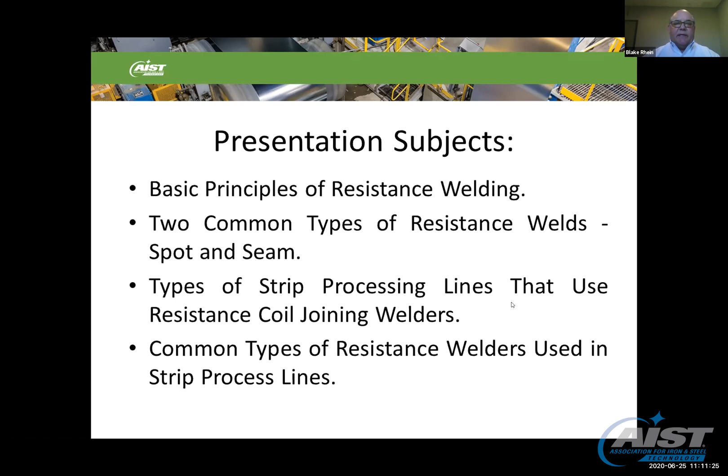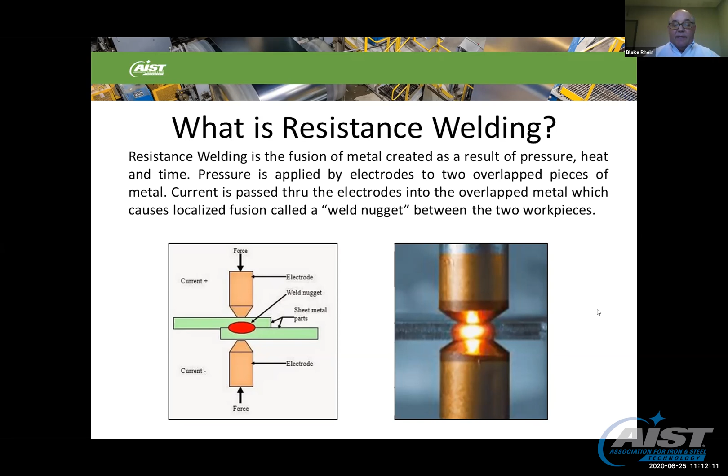So the first question is, what is resistance welding? Resistance welding is the fusion of metal created as a result of pressure, heat, and time. Pressure is applied by electrodes to two overlapped pieces of metal. Current is passed through electrodes into the overlapped metal, which causes localized fusion called a weld nugget between the two pieces. You can see on the image to the right, the two copper-looking pieces are the electrodes, and that bright, shiny part in the middle is the weld nugget being formed between the electrodes.

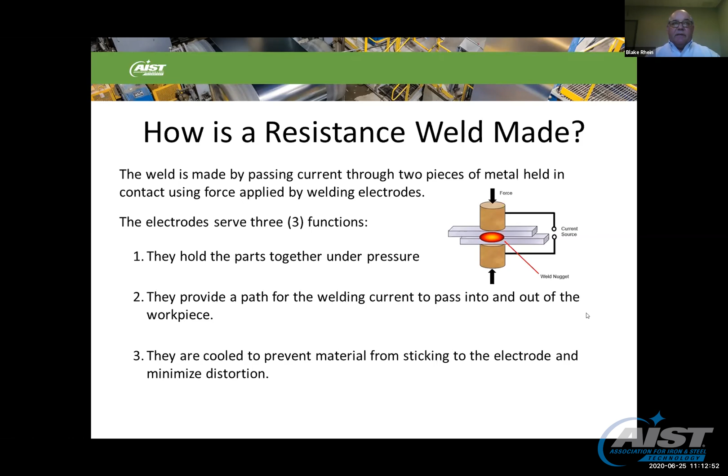The next question is, how is a resistance weld made? The weld is made by passing current through two pieces of metal held in contact using weld force applied by welding electrodes. The electrodes serve three functions: they hold the parts together under pressure, they provide a path for the welding current to pass into and out of the workpiece, and they are cooled to prevent material from sticking to the electrode and minimize distortion at the weld interface.

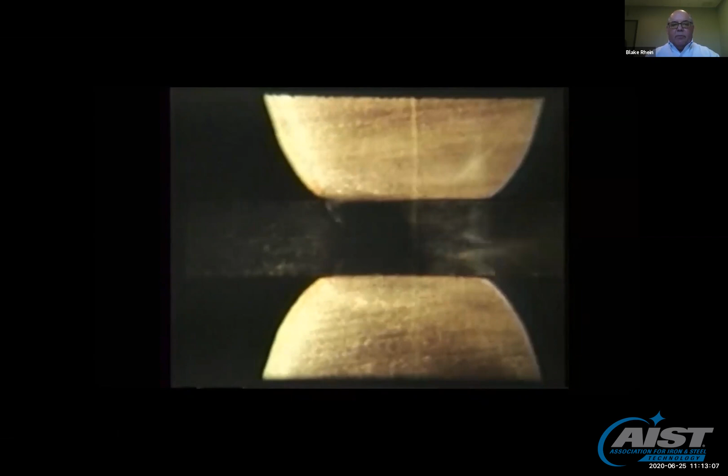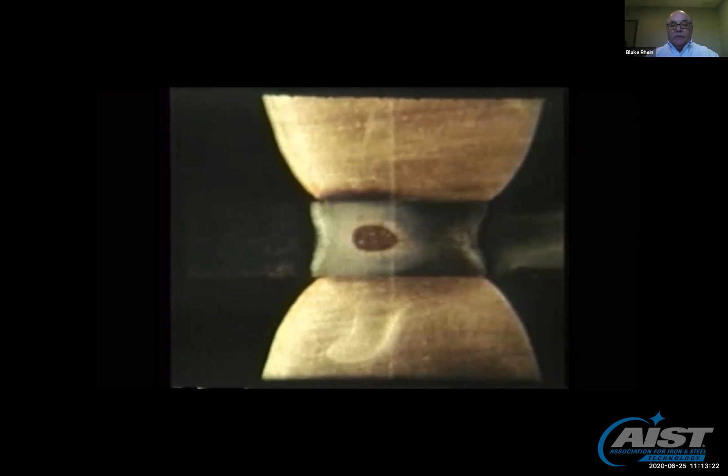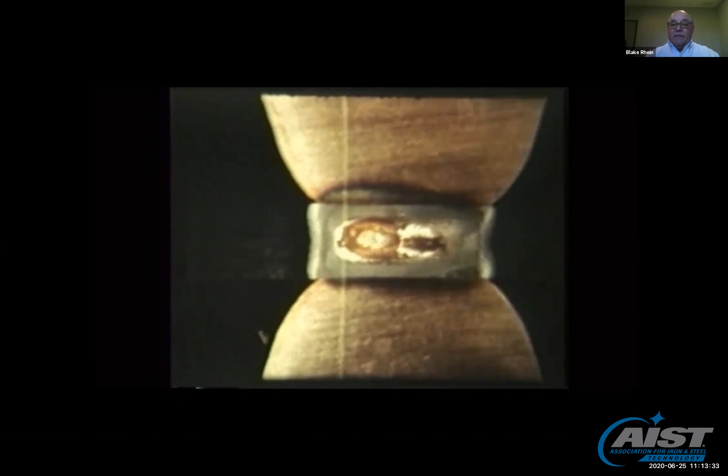This is a video of a weld being made, shown at 2 times slow motion. The yellow parts you see above are the electrodes, and the weld nugget is being formed in the metal between the two electrodes. You can see the heat being generated between the two electrodes and the beginning of the weld nugget being formed. That beautiful looking weld nugget that's spinning and being formed is actually molten material being created between the two electrodes.

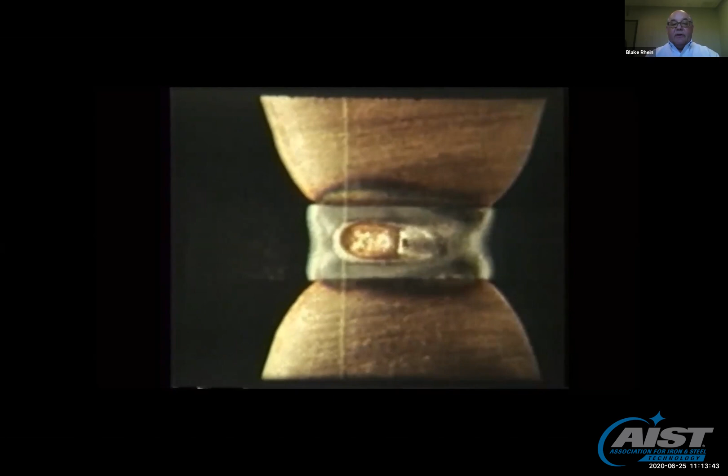The electrodes stay in place with force, and you can see the heat being dissipated into the electrodes. After the nugget is formed, the electrodes release and the material is joined. So that is a spot weld.

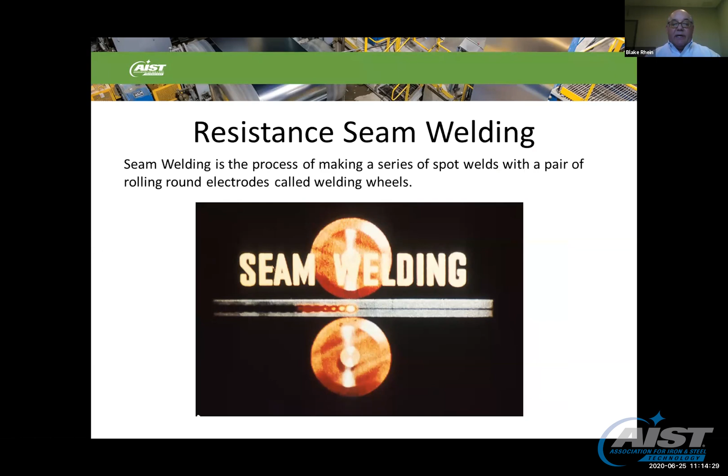The second type of resistance weld we'll talk about is a seam weld. Seam welding is very similar to spot welding, but it uses two round electrodes that deliver current to the workpiece. Seam welding is the process of making a series of spot welds with a pair of rolling round electrodes called welding wheels. In resistance seam welding, a silicon-controlled rectifier, or SCR, is mounted in a weld control that turns the welding current on and off at predetermined periods of heat time as the weld wheels move across the workpiece.

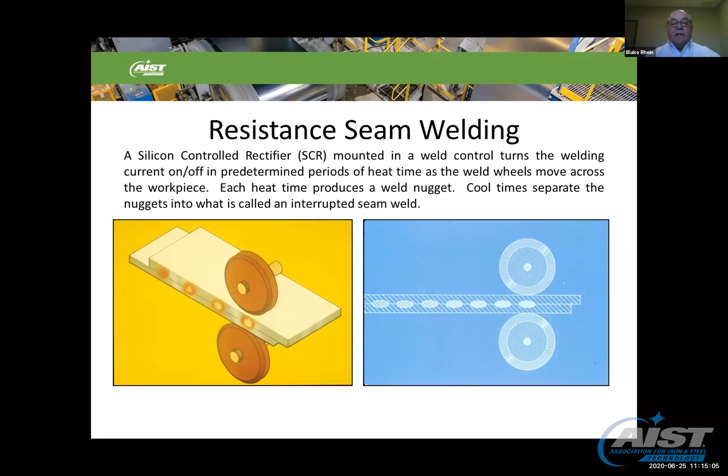Each heat time produces a weld nugget like you saw in the video. Cool times separate the nuggets into what is called an interrupted seam weld. Shorter cool times cause the nuggets to overlap each other, which produces a continuous airtight seam between the workpieces. Whether the nuggets are spaced far apart or overlapping depends on the application. In most airtight or watertight containers sealed using resistance seam welding, the nuggets are overlapped so that the container or vessel is airtight or watertight.

Whereas some piece of structural steel used in construction doesn't need the weld nuggets to be overlapped - it just needs the weld strength. So the nuggets would be spaced further apart.

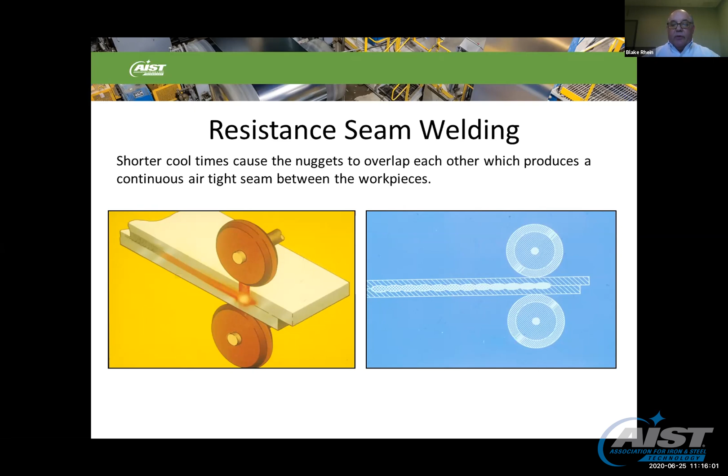The types of strip process lines that use coil joining resistance welders include coating, galvanizing, coil buildup, pickling, cold rolling mills, and chrome plating. The coil joining welders are used in virtually any continuous process line to enable that line to run 24/7, 365 days a year, except for maybe a couple of weeks of maintenance downtime.

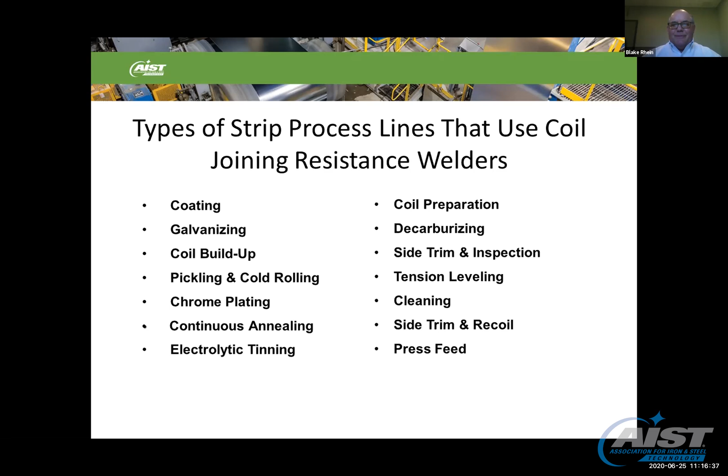The common types of resistance welders used in strip processing lines include a resistance spot welder, such as the one shown on the left, or a resistance narrow lap seam welder, which in the industry is sometimes called a mash seam welder.

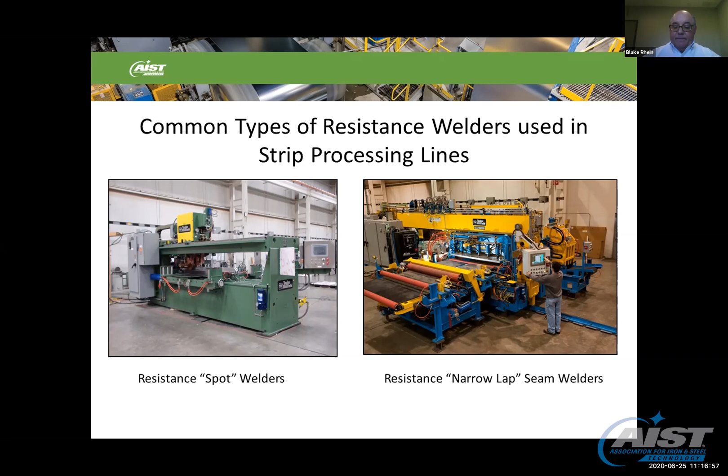With coil joining spot welders, the resistance spot welders for coil joining are designed to create a weld between 2 overlapping coil ends. The weld is considered a transport weld, since the resultant weld joint equals the 2 strip thicknesses being joined, with no reduction at the weld interface.

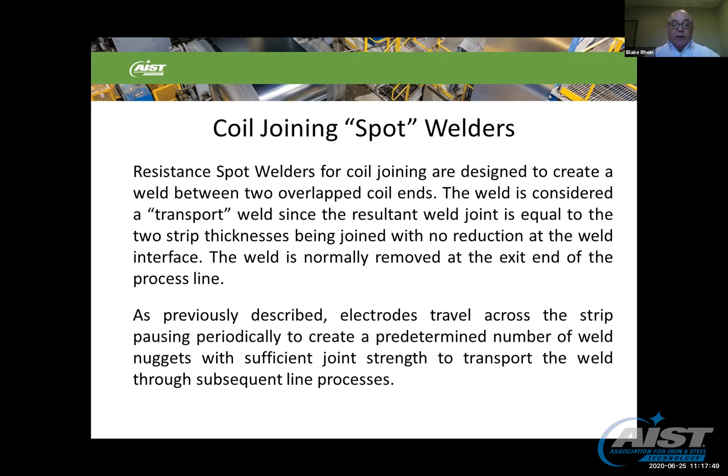In this case, the weld is normally removed at the exit end of the process line. As previously described, the electrodes travel across the strip ends, pausing periodically to create a predetermined number of weld nuggets

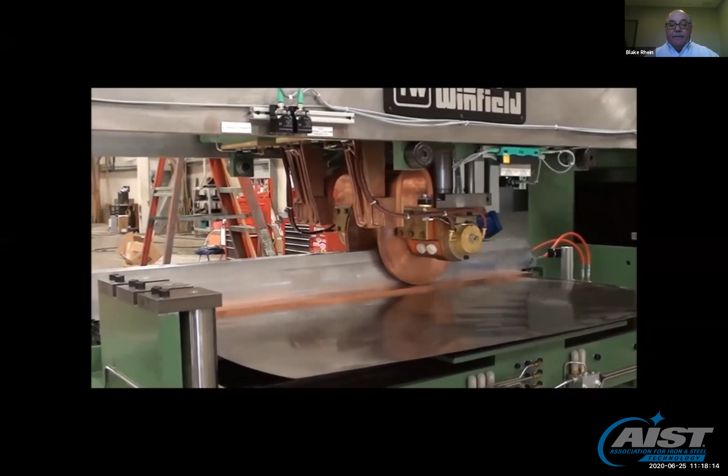with sufficient joint strength to transport the weld through subsequent line processes. This is a video of a roll spot seam welder. The electrode heads are lowering. They travel across the overlap between the two steel sheets. Whenever you see the weld head stopped, a weld is being made. When it's moving, that's called the cool time. So in this case, we're making a series of spot welds across the strip overlap.

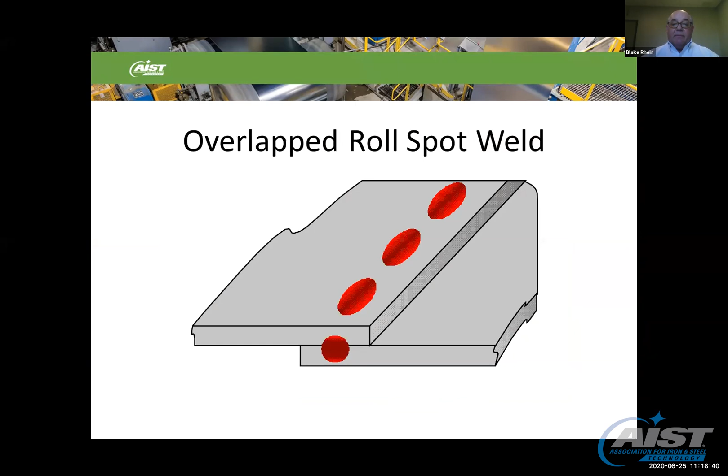In the case of resistance narrow lap seam welders, a resistance narrow lap seam welder creates a smooth, thin, and ductile overlap welded joint. The strip ends are narrowly overlapped and electrical current is passed between them using welding wheels to create sufficient heat for fusion. Pressure is applied as the weld wheels travel across the overlapped strip ends, resulting in a welded interface with near zero weld over thickness across the strip material.

The weld seam can pass through the processing line, generally without creating damage or requiring changes to the line operating parameters. And then depending on the type of the process line, the weld may or may not be removed at the exit end of the processing line.

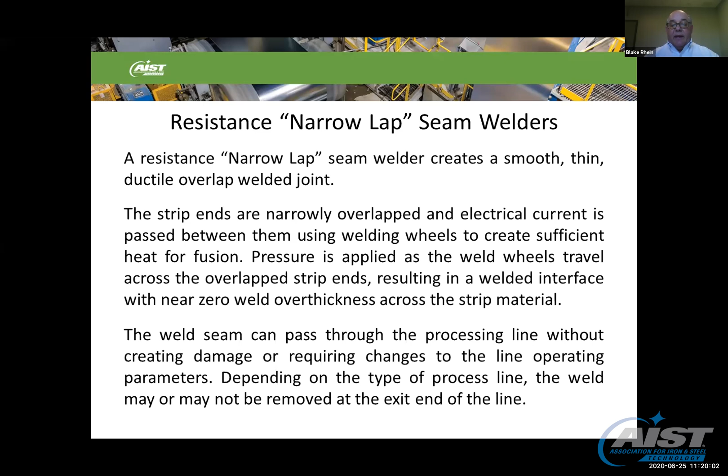A narrow lap seam weld graphically looks something like that. It's near parent metal thickness after the weld is made and is sufficiently strong to hold through the process line.

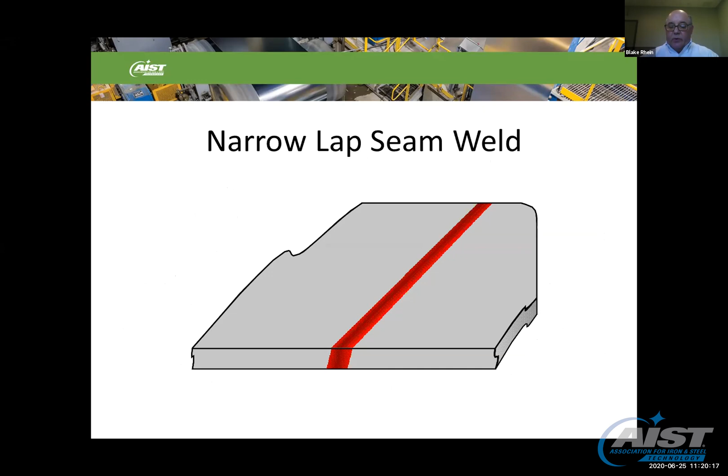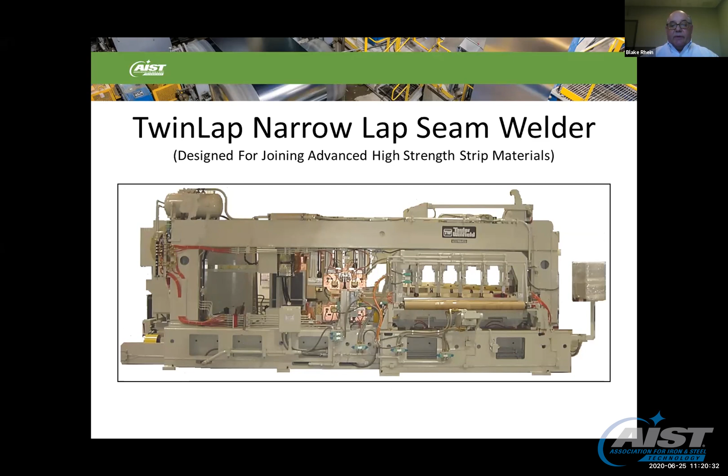This is a typical narrow lap seam welder. It's what we call a TwinLap narrow lap seam welder, which was designed originally for joining advanced high strength strip materials. So let's show you the sequence of how a TwinLap narrow lap seam weld is made.

In this image, the horizontal blue lines represent the strip material. So the strip ends are stopped in what's called the welding shear gap in between the entry and exit clamps.

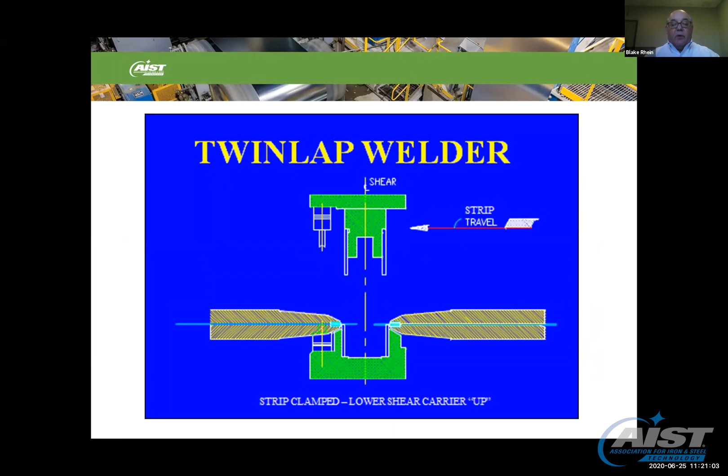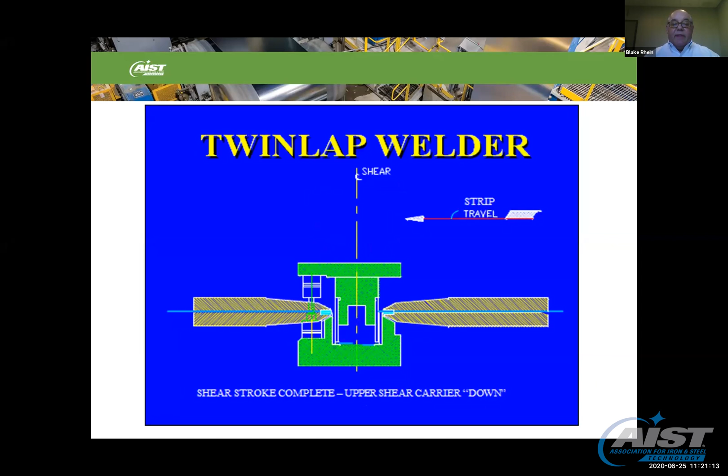The clamps are closed. After the clamps are closed, the lower part of the shear carrier moves up to make contact with the underside of the strip material. The upper shear then comes down and cuts the material.

Once the strip ends are sheared, they're squared to each other and ready for overlapping.

In this case, the exit side, called the exit pivot clamp, moves up, and the entry clamp moves forward, and then the exit clamp pivots down, which creates the overlap between the 2 strip ends.

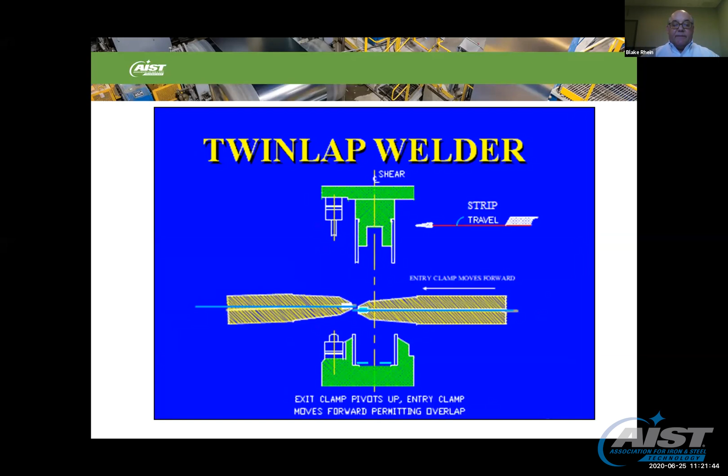Once the material is overlapped, the exit clamp pivots down to make the overlap, and the strip end is ready for welding and planishing.

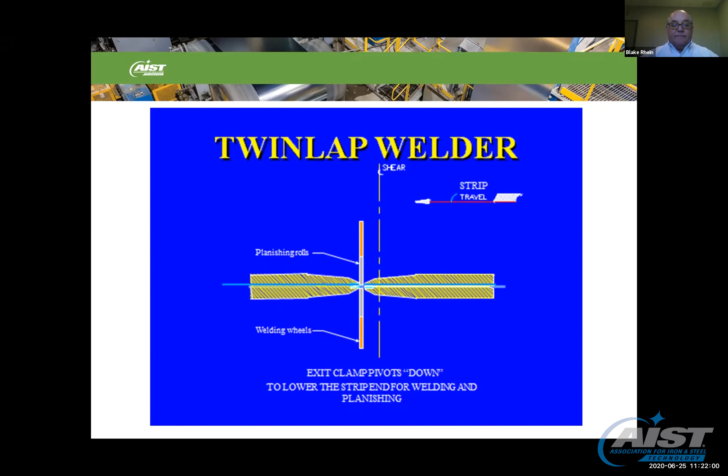Here is a typical machine cycle. The clamps are closed, the exit shears the material, the entry clamp moves in, the exit clamp pivots down, and then the welding carriage drives the welding wheels across the strip material. That happens to be 2 pairs of welding wheels.

The small silver wheel following behind it is called the planish wheel that simply polishes off the weld and makes sure there's little or no weld over thickness. So this is the sequence moving across the strip material, making the weld.

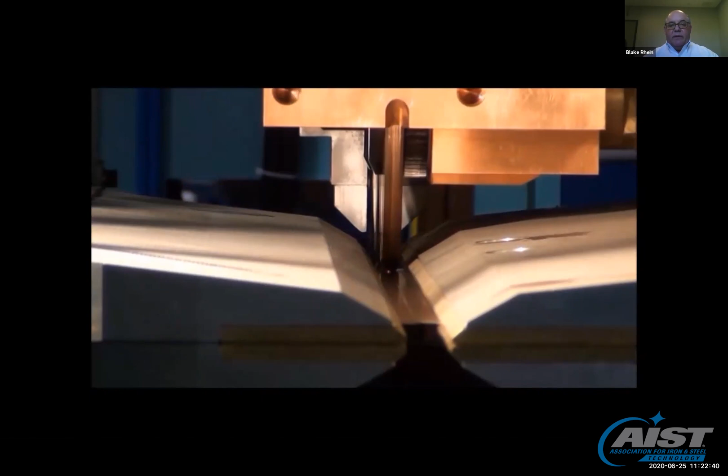In this view, you can see the current being created in the overlapped interface between the head and tail end of the strip material. Once the sequence is done, the clamps open and the strip is released to flow through into the process line.

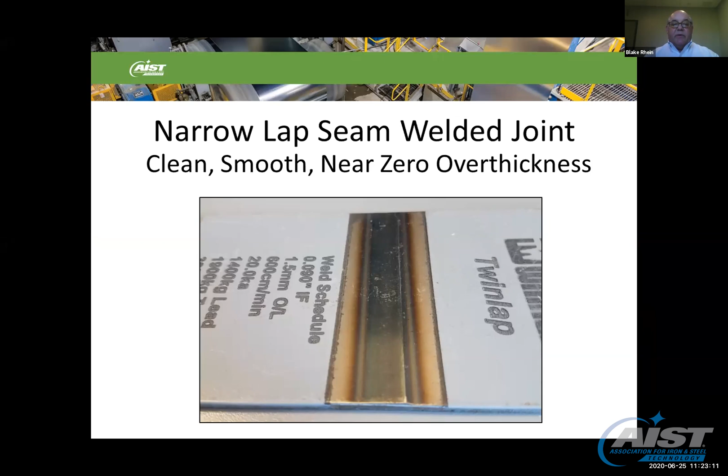So this is an example of a sample of a narrow lap seam welded joint. It's clean, it's smooth, and there's near zero over thickness.

My last couple slides will talk about today's strip material and what's called post-weld heat treatment. With today's advancements in material strengths, steel has higher strengths and carbon equivalent values that can make the weld brittle after joining. Post-weld heat treatment is often added to the welding process to restore ductility to the weld without sacrificing weld strength, and to ensure weld integrity to prevent weld breaks downstream in the process line.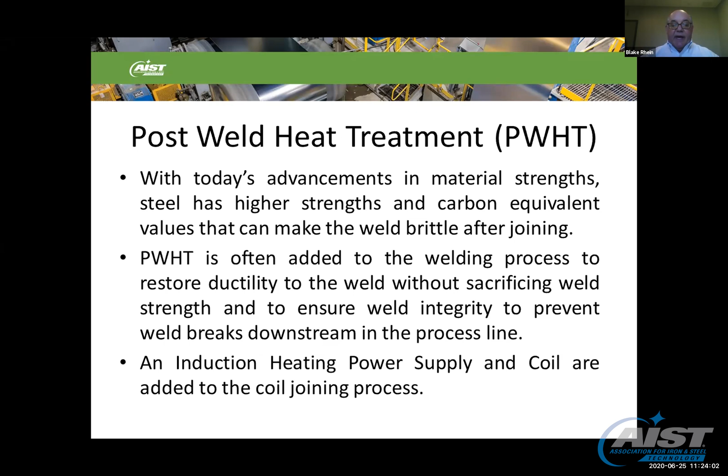An induction heating power supply and coil are added to the coil joining process. And in my last video, you will see the process operating, with the weld wheels going across the strip material, making the weld.

And trailing behind is a very long induction heating coil. The red parts that you see are the induction heating coil. So after the welding sequence, the clamps will reposition the weld to the center line, and the induction heating coil will be lowered to then induction post-weld heat treat the welded interface. After the post-weld heat treat sequence is finished, the clamps open and the weld is released into the process line.

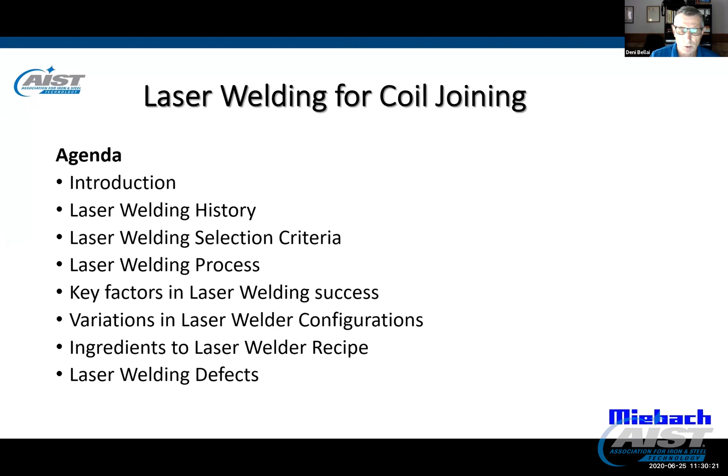So who am I to be talking to you about laser welding? Besides what you've already been told, I can add this: I've got about 20 years of working experience with industrial lasers. I've worked on developing laser cutting using solid state lasers, as well as developing the welding process and reliability systems for a CO2 laser welder. Now I'm the sales agent for Hugo Miebach welding machines here in Canada and in the US.

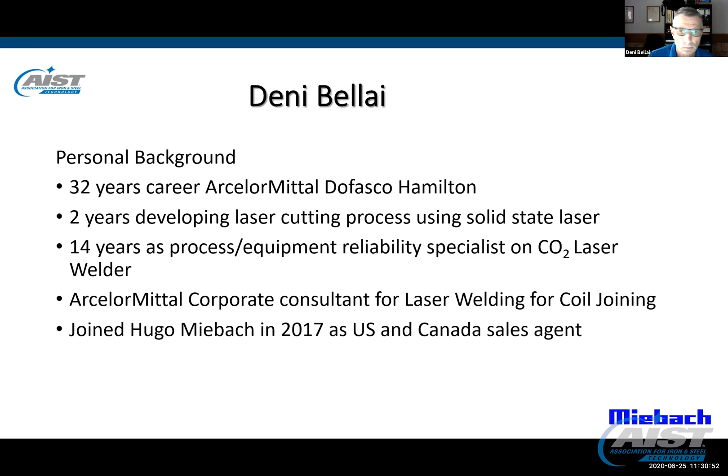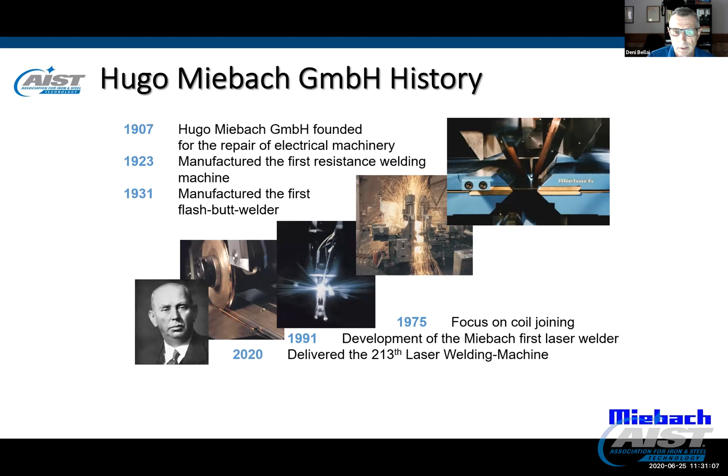Now for the brief history lesson. Laser welding has been in use in the steel industry since 1991, when Hugo Miebach put their first laser welder into production in Rockport, Indiana. Since that time, over 213 laser welding machines have been put into service by Miebach alone, and this does not account for other laser welding machine manufacturers.

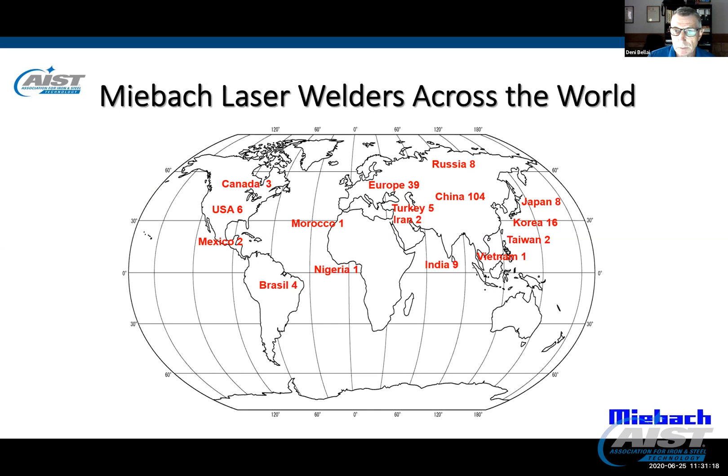Now that you've had some background information, you might ask, why would anyone want to consider a laser welder to join their coils together? Mostly that comes down to their capability to weld practically any steel together quickly and reliably. The technology not only has an inherent wide range of weldability, but it's also easily adaptable or flexible enough to work with other welding tools.

Let's start with weldability. Laser welding enables the coil joining process to weld the widest variety of steels. It's the most capable process for joining different steel grades and cross sections to one another. It can weld hot band or tin plate and all varieties of finished products in between. The process itself is minimally disruptive due to the very small heat affected zone. It is very conducive for inline heat treatment, to maintain ductility in the weld with minimum disruption of the cycle time.

Wire feeding is also easily adopted to the laser welding process. This allows for the dilution of the hardenable material from the weld, thus maximizing the capability of the welding machine.

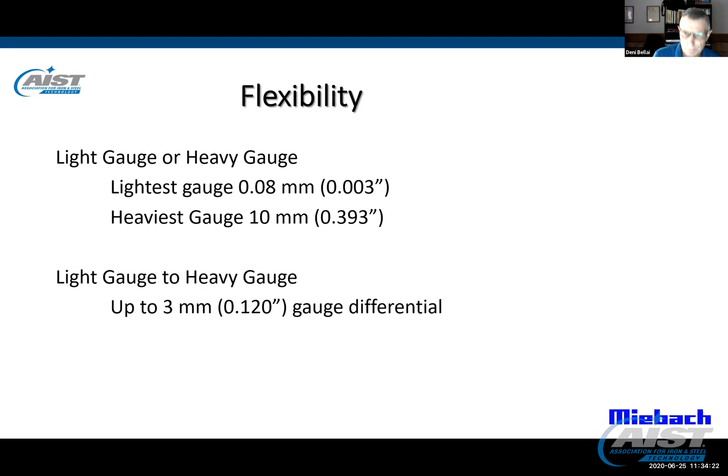With the increased availability of higher laser power and the introduction of faster drive systems, laser welding machines now have surpassed other welding processes in the coil joining field. Cycle times of under a minute are quite common in heavy gauge applications. The reduction in cycle time not only increases productivity and throughput, but allows line builders to use shorter loopers to reduce capital costs and minimize footprints for their new process lines.

Laser welders produce no over thickness. The welds are flush with the surface of the parent material. Welds can be rolled in cold mills or temper mills without opening gaps or producing off gauge. Coating or painting lines do not need to be disrupted as the weld passes through the process, avoiding damage to roll coaters or other equipment.

Line stops or slowdowns are often not required when the customer will accept welds in coils when the laser is used. On high-value products like electrical steel, silicon steels, and coating in tin lines, the additional cost of a laser welder often is justified in less than a year if you look at the ROI, and that's just from the increased yields.

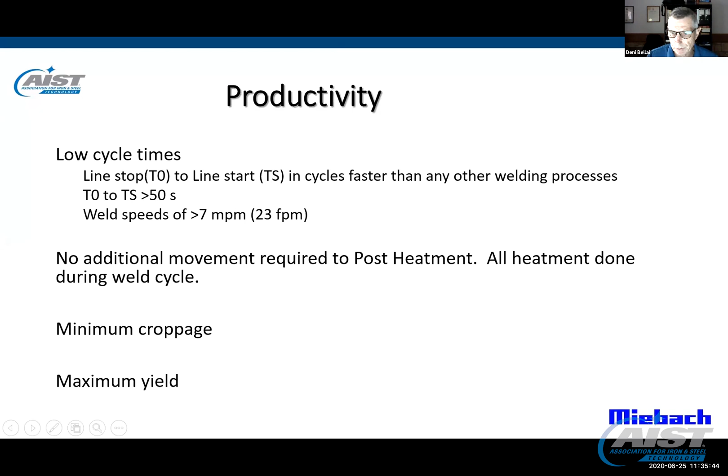So laser welding produces the strongest, most reliable welds in the industry.

Weld break rates of less than 1 in 1,000 are reported by Miebach customers on lines that have cold mills attached to them. First-time weld rates of greater than 95% on pickle lines and over 98% on cold rolled products are achievable. Laser welders do not necessarily need constant maintenance or production stops to keep the welder running.

There's no welding wheels to be redressed or trimmer bits to be replaced. Typically, a laser welder needs minimum maintenance between scheduled outages. The laser welders do have their own unique specialized maintenance requirements, but overall cost for maintaining a laser welder in the current state of development is hardly more than a resistance welder.

Laser welding can be the most capable of all coil joining processes. That capability can only be sustained by providing a stable machine, otherwise it will turn into your biggest nightmare. There are a lot of moving pieces in a laser welder with sensitive optics that have a low tolerance for dirt. When these parts wear or the optics degrade, the capability is quickly lost.

A good machine design is strong and simple to work on. A machine that minimizes wear points has long-term benefits in sustaining that designed-in performance capability. Reducing sources of contamination while protecting the optical components from weld fume and spatter will extend life.

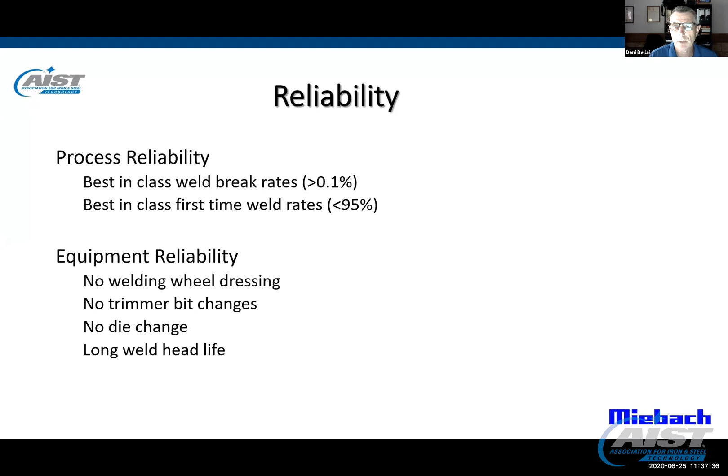Laser welding is similar to seam welding or resistance welding that Blake was just talking about. The strip still needs to be positioned with a pinch roll and centering guides, so it's very much the same in that way. The ends of the strip still need to be cut and squared off in preparation to be joined. The differences come in the geometry of the cuts and the type of energy used to fuse the material together.

In laser welding, the heat source is derived from focused laser light energy. The profile of the cut needs to be extremely square.

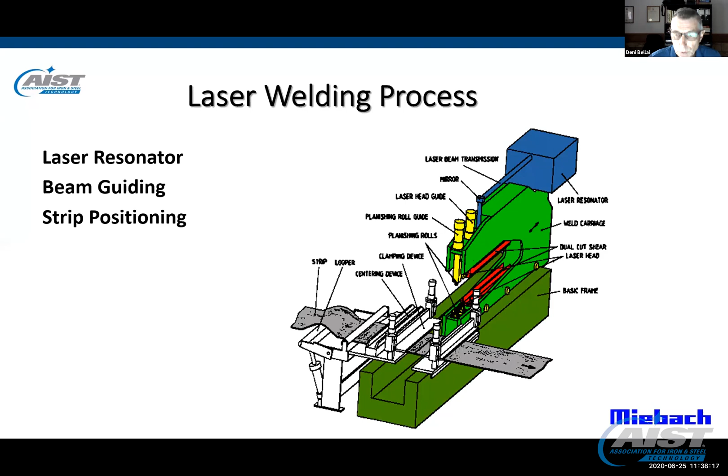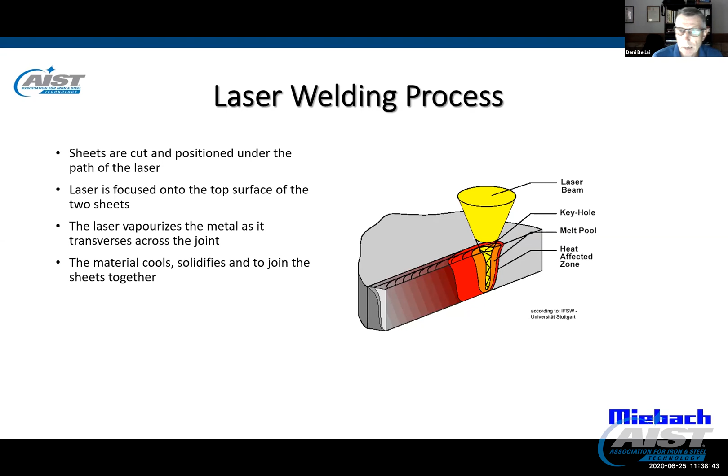So the laser welding process begins with preparing the strip by cutting the ends and positioning them under the path of the laser beam. The laser is focused down onto the joint between the two strips. The high power density of the laser light energy vaporizes the metal as its focused beam traverses across the joint. The metal cools and solidifies and forms a seam that joins the two pieces together.

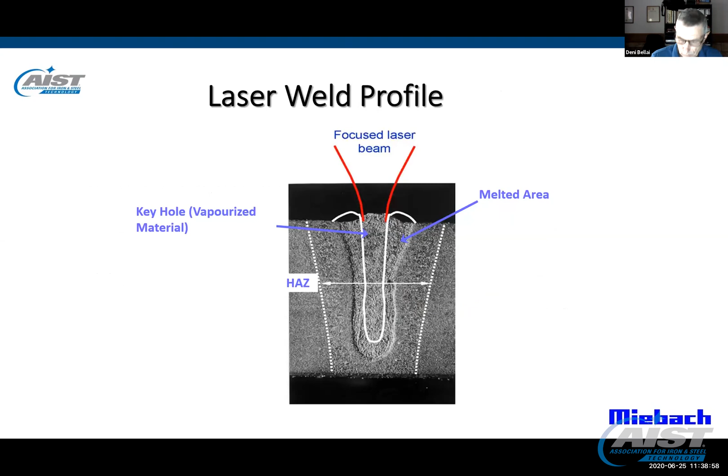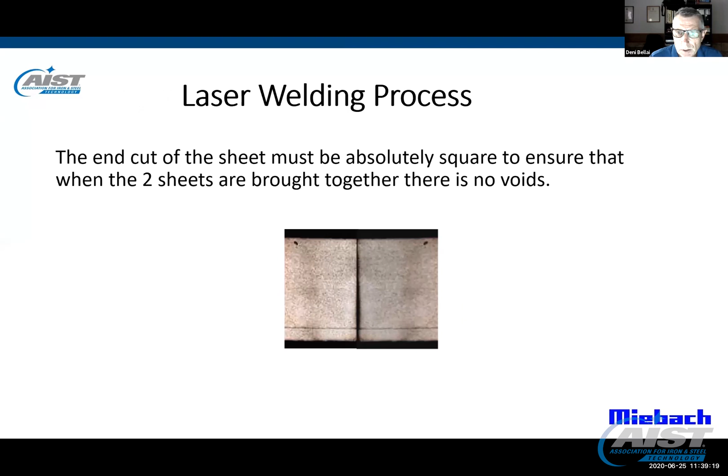So the laser welding process requires very accurate and precise positioning of the strip and the laser beam. Starting with the cut profile, it must be nearly perfectly square, so when the sheets are brought together, there is a tight fit and minimal voids in the gap.

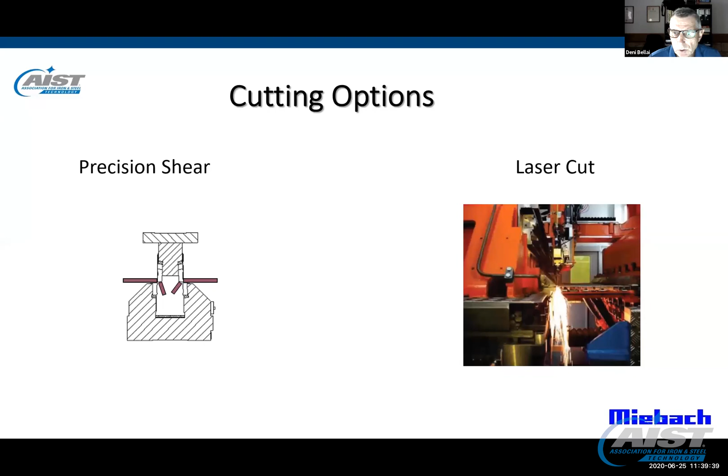To achieve this kind of geometry, there's a couple of options for cutting the strip ends to provide a clean square cut. The most common method is to use a precision shear, which is shown on the left. More recently, laser cutting has been used for this purpose. They each have their advantages and disadvantages.

The apparent maintenance cost advantage of laser cutting has drawn much interest of late, but this is a dirty process, and that has a fairly high operating cost when you start looking at gas consumption. A close look at the total cost of ownership may surprise some, so a review of all costs should be undertaken to determine which is really the best suited for a given application.

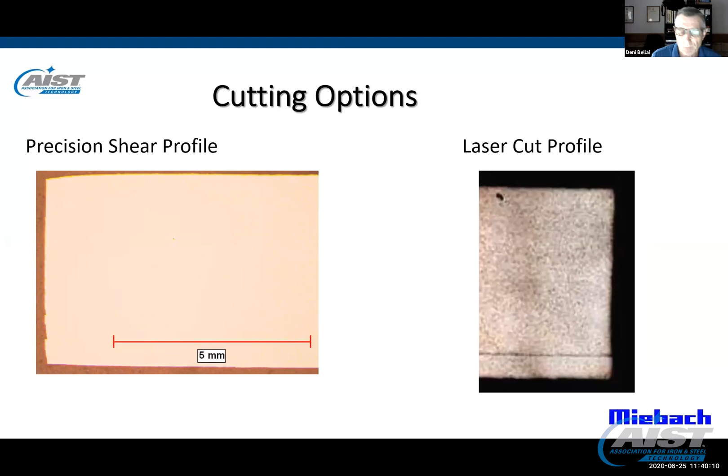There are two options to be considered for the laser source in laser welding. The one that has been in use almost exclusively for the past decades is CO2. In the last few years, the welding manufacturers have been offering solid state lasers as an alternative. These two laser types are quite different in their optical characteristics and each have their own unique set of processing characteristics. Which laser is best is a subject that is quite involved. An in-depth review needs to be done to understand the implication that each has on weldability, reliability, and safety.

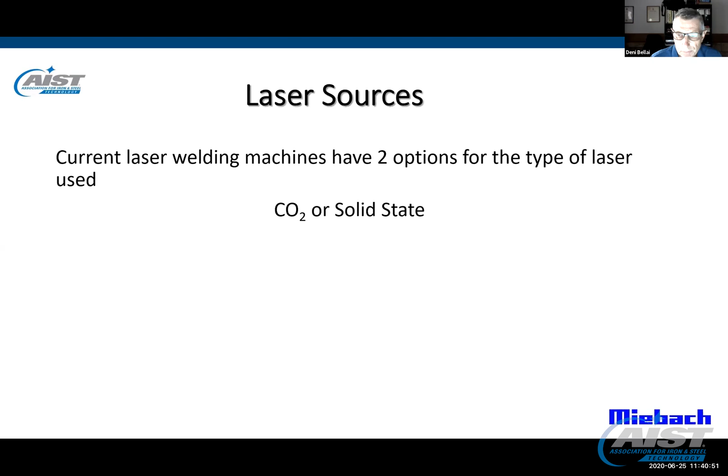What goes into the welding recipe? A recipe for a laser welder has a number of different parameters that can be adjusted to produce a good weld. The key factors are laser power, welding speed, focus position, and gap between the strip.

If the machine has pre and post heating, the power settings for these are also required. If the machine uses laser cutting, then again, the power, cutting speed, focus must be set as well as a gas flow rate. There are as many as 15 individual parameters in each recipe.

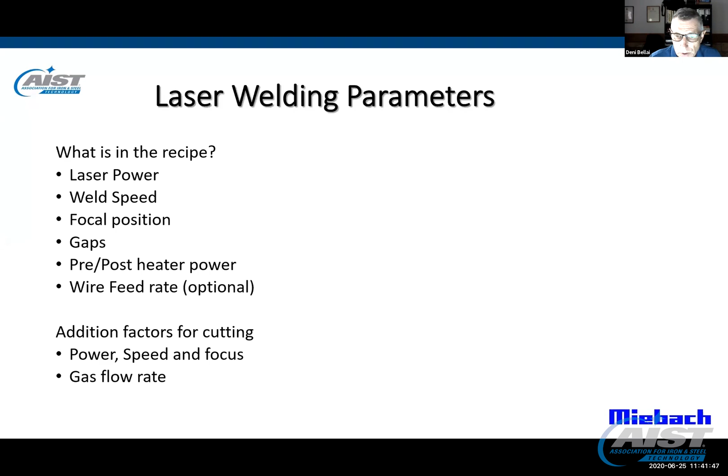Recipes may vary between material types that they're joining, the thicknesses, and the combinations of material types. It's not uncommon to have over 2,000 recipes for a machine, with 30% of these in regular use. Recipe development is a long and tedious process and requires a good understanding of the process to optimize.

Laser welding is not perfect. It can produce bad welds if the process parameters are not properly tuned, or if there's a problem with the machine. Often there's an issue with something on or in the material that affects the welding. The net result is a bad weld. The most common defects can be categorized as either underfill, reinforcement, lack of penetration, porosity, or mismatch.

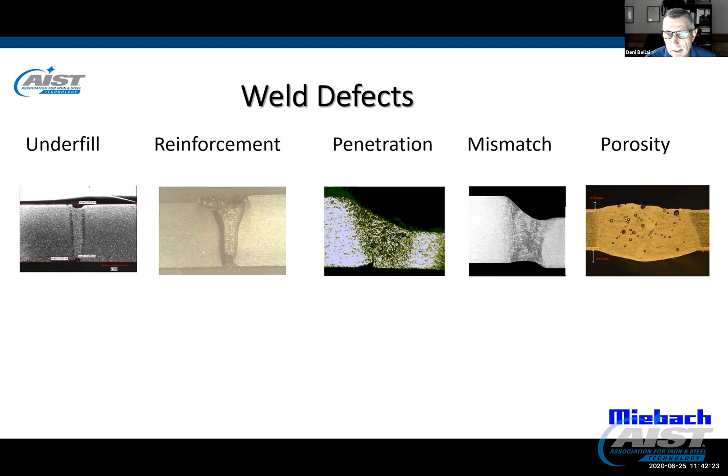There are a number of tools that can be used to detect these defects, but I'll leave that subject to our next presenter to delve into.

If a laser can weld practically any steel together faster and more reliably than other welders, why not go with them all the time? Well, it comes down to cost. Laser welders can cost over 40% more than a seam welder. Does your process need all that capability of a laser welder? Or can you use a resistance welder or other coil joining technology instead?

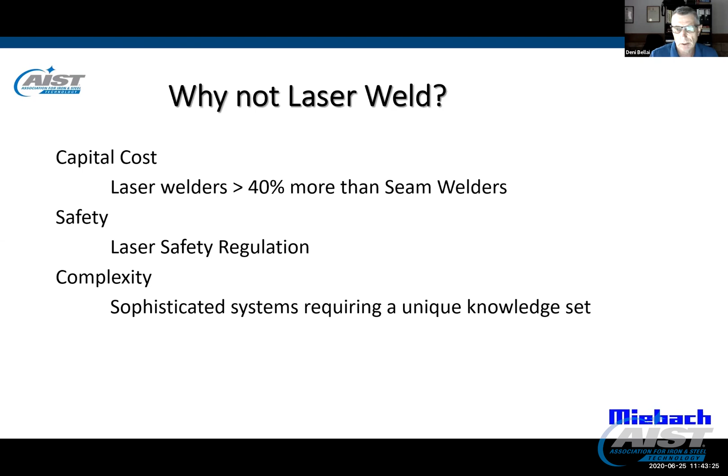The laser adds an added risk factor to the safety of those working on it. There are stringent regulations regarding protective devices and training that are required for a laser welder, that are otherwise not required for other types of welders. These must be considered. Finally, the laser adds an added layer of complexity to the operation and maintenance of the machine. Additional training and new skill sets must be developed to maximize the benefits of the machine and sustain its inherent capabilities.

Well, that brings me to the end of my presentation. I hope you got something out of it. I'm now open for questions.

Oops. All right, let me see over here. I think there are still pending questions for Blake, which I'll get back to at the end of the seminar. But Denny, I have two questions for you. Okay, one is...

What type of welding can be used for joining gauges with differential thickness of more than 3 millimeters? I don't think there's a welding technique that can handle that. I'm not sure about plasma, whether that would be any more capable than a laser. Pretty much anything you can do with plasma, you can do with a laser. So more than 3 millimeters, that's quite a large jump—I don't know, I can't say.

So just adding to this question, and this was another question I asked: what is the difference of thickness and width which can be welded? That's pretty much that 3 millimeters is the most I've ever seen when combining two pieces together. Now I was talking about something that was 2 millimeters to 5 millimeters. I wouldn't want to be doing like 0.5 millimeters to 3.5 millimeters—that could potentially be a problem. But in the heavier gauge machines, I would say 3 millimeters is the max.

So today we're going to talk about inspection of welds - seam, overlap, and laser keyhole. I myself am far more experienced in laser UT than in welding itself, even though I've been in the industry for quite a while, so I'm sorry if I make some small mistakes, but I'm trying to focus mostly on inspection.

So right into the topic - failure causes, there are many. It could be wrong or non-optimized welding parameters, drift in voltage or pressure, drift in laser alignment, laser energy, surface conditions, overlap cut - many different causes that lead to different failure mechanisms, which could be a plain cold weld, a brittle fracture, insufficient weld area, nugget problems, or localized defect propagation caused by voids or inclusions.

100% prevention of weld failures is not a simple challenge, but weld breaks cost so much in productivity, it's worth trying. To be short today, I was aiming to look at everything related to quality control - I would have busted my 15 minutes.

So I'm not going to cover embedded sensors that come with the welder - these are basic, they're all offered, and they're quite important. I will not cover pyrometers or profilometers because I won't have enough time, but I think pyrometers are widely used. In the end, there's no technology right now that can replace human decision. The goal in our topic, and in Tecnar's mission, is to completely replace decision-making by having a technology that inspects the whole volume of the weld. That, in our opinion, has to go through ultrasounds - it can be added to laser cameras and profilometers, but ultrasound is the only real way to inspect the volume.

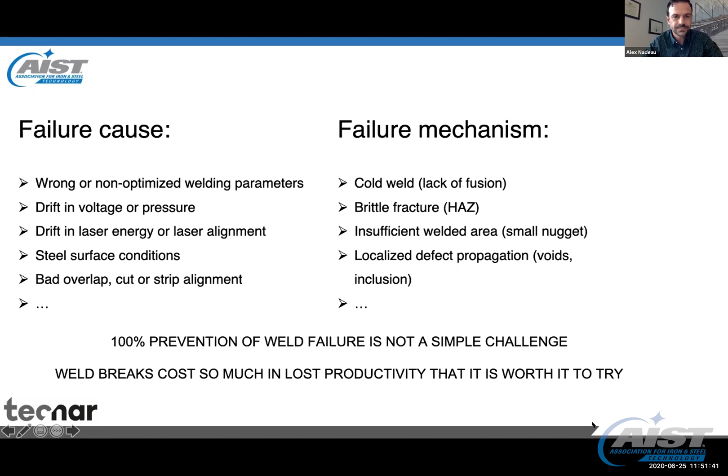I will start covering the topic using EMAT ultrasounds, which has been around for quite a while. EMATs, for those who don't know, are non-contact laser, non-contact UT. It uses magnetostriction when you have a ferromagnetic material, or combines magnetostriction with the Lorentz force, which is an interaction between eddy currents and magnetic fields. It uses that to generate stress in the material that propagates sound. It's mostly used to propagate what we call lamb waves, guided waves that can travel pretty far in the strip. It needs to be in very close range with the strip when you do EMATs - this magnetic field gets weak as you get far from the steel. So EMAT technology, which is widely used, needs to be in very close contact and needs to follow the strip.

Now, Innerspec is the company marketing a product. Rest assured that all the content I'm showing today has been vetted by Innerspec themselves, and they actually provided the next few slides, so it's in full transparency. The Innerspec product will guide a wave and measure any backscattered sound from the weld.

So it could be a lack of fusion, cracks, or porosity - anything that's there will trouble the ultrasound and send some back to the detector. So it's a pretty simple concept. The detector is about 4 inches in width, so it cannot be exactly inspected while we're welding. Actually the grippers need to move back a bit, so typically the sensor will scan on its way back because one of the grippers will have made room for the EMAT to get close to the strip.

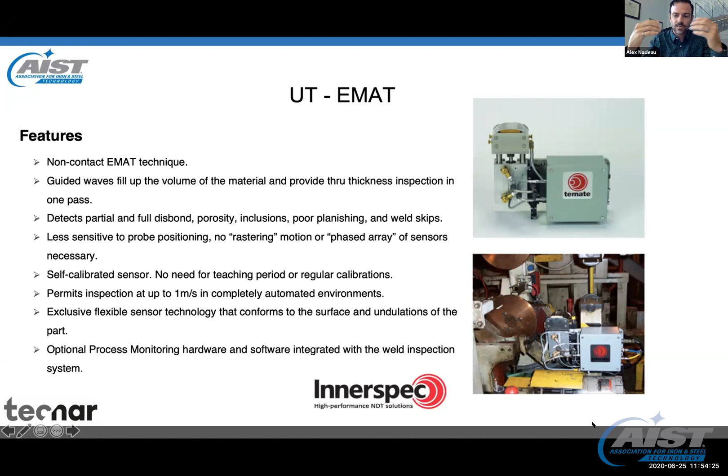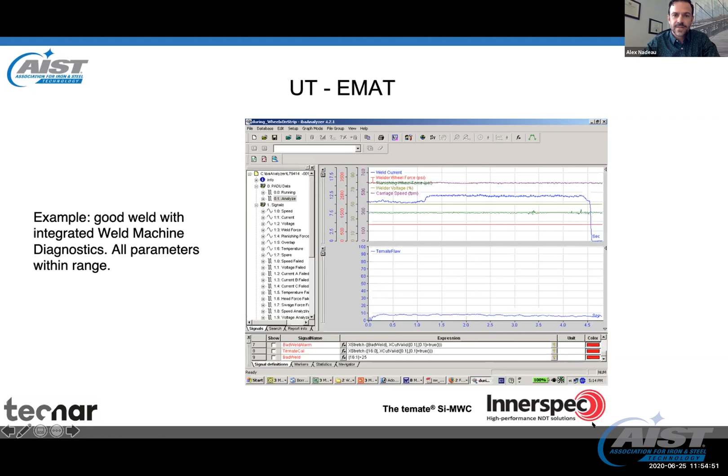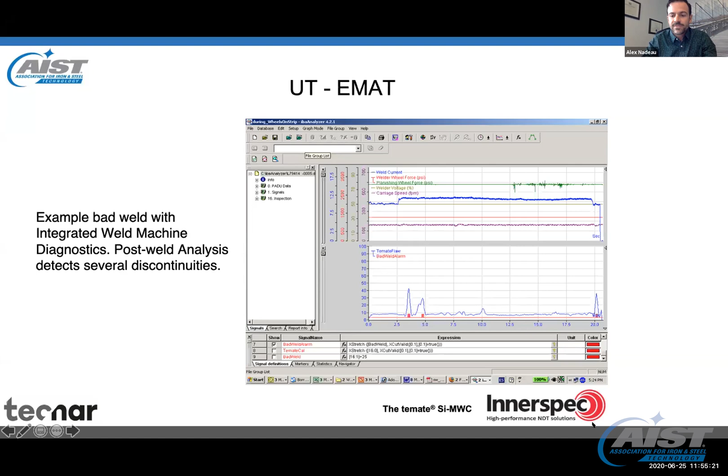And here's a case of what we could consider a bad weld. Again, there were some changes in the welding current, as we can see in the upper chart, and in the bottom chart we got at least 3 spots of backscattered sound, enough for the operator to say this needs to be re-welded. It all depends - the threshold depends on the recipes of the clients. From then on, it could be an automated decision or a human decision, but at least it's a relatively reliable inspection of the volume.

Now the other UT technique that's been there for quite a while is laser UT. Laser UT was invented in the 60s and industrialized in the late 90s. It's also a UT technique that's non-contact - basically we just focus the laser on the surface to generate sound. It's a pulse laser, and we listen to any echo coming back with a second laser, called the detection laser.

The benefits of laser UT are that it generates very high frequency content, like a shock wave, and can basically measure very fine structures in what's to be inspected. It can also be focused on very small spots, so we know exactly where we're generating the sound. It also generates all 4 main acoustic modes - longitudinal, shear, surface, and plate waves - so you get all that in a single shot. It's not affected by movement of the target, temperature of the target, roughness of the target, or orientation.

So it's quite rugged for industrial applications. Not allowed to talk about price, but it's a double laser technology, so it's not cheap. If you can do it with traditional ultrasound, that's what you need to look for, because laser UT is an advanced technology, but it's really mature.

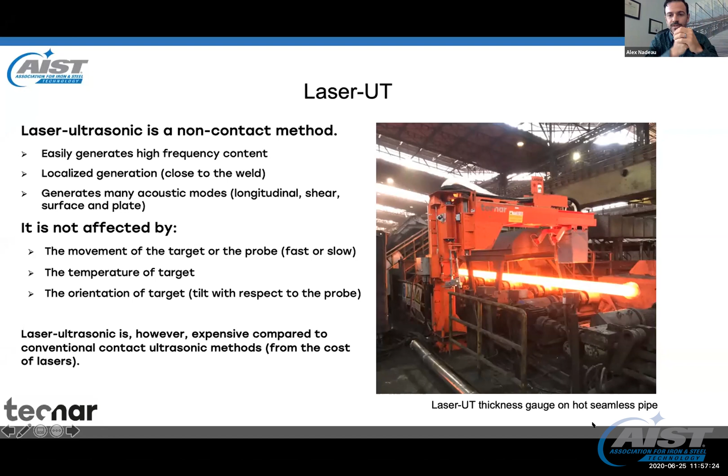As you can see on the right, that's a Tecnar laser UT system. It's very bulky because it's made to be super robust. We installed those systems in seamless pipelines, and we measure the thickness and eccentricity of the hot pipes after elongators, piercing, or sizing mills. This goes through up to 50 millimeters of steel at 1,000 degrees Celsius. So it's an industrial technology, and it can be miniaturized to be quite small - in this case there's space so it doesn't matter, but it's an example of an industrial laser UT application.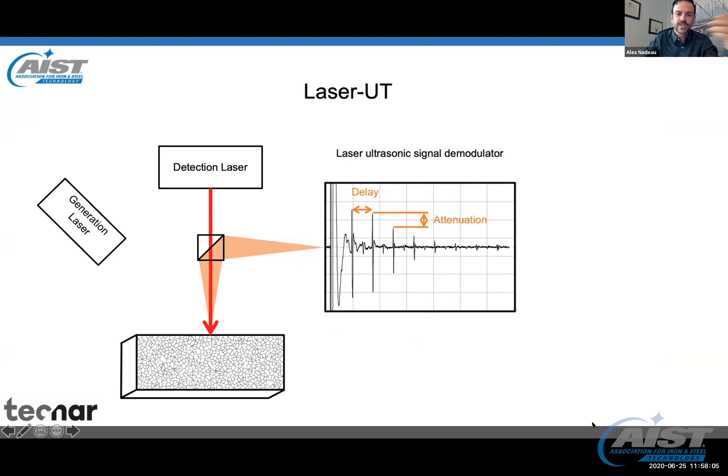Here's a small schematic of how it works - we shoot the laser spot, and the detection laser shines for a longer period of time, enough to capture the ultrasound. This is a real laser ultrasound A-scan, as we call them, and you can see that the resolution of the echo is quite high frequency. This allows for a lot of analysis, namely attenuation measurements that can reveal the microstructure of the material - this is a bit like the second wave of using laser UT, not only for defect measurements but for microstructure. So I'm going to talk about two ways of using laser UT.

One method is what we call pitch and catch. This would definitely be used for laser butt or keyhole welding, because it's not relevant to just scan the weld itself, you're just going to pass sound through it like the inner-spec product would. So pitch and catch is laser on one side, detection laser on the other, and we send the sound through it. It measures the whole volume of the weld. It backscatters, and attenuates if there's any porosity or lack of fusion.

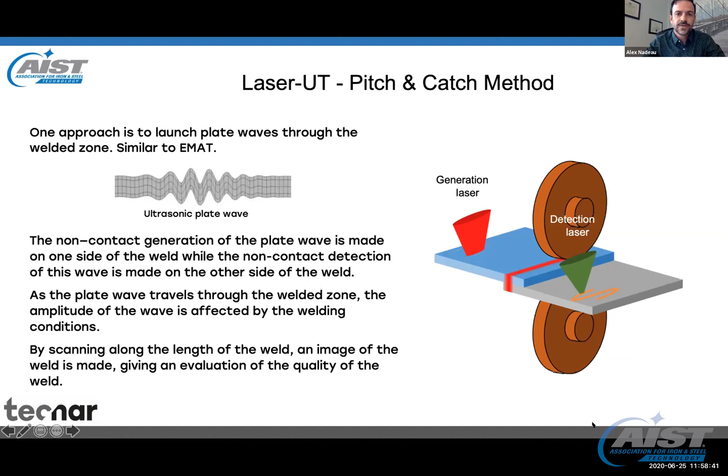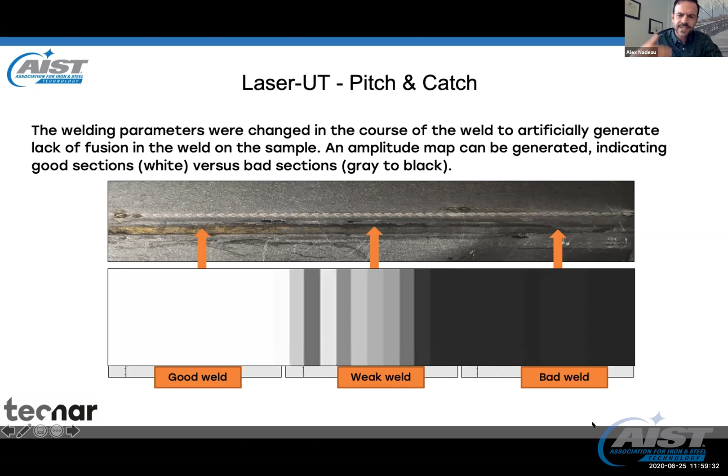You can see that it can be color coded, and you can see the laser spots. We can basically generate and detect quite close to the weld itself, so it can be installed right at the welding with the grippers at their standard positions, and it's not affected by the temperature of the strip.

The second method I'm going to talk about today is called overlap. When we say overlap, the generation of the sound and the detection is done at the exact same place, which allows having a full 2D scan of the weld as it goes through. For the next slides, I'll be presenting 2D scans of welds provided by our partner.

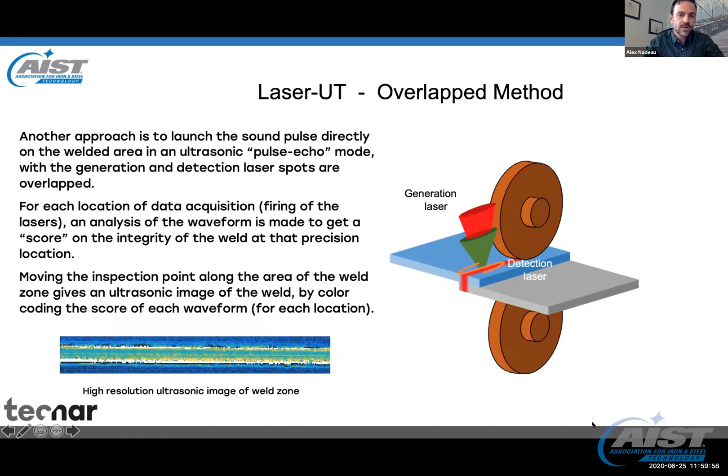First, we looked at 4 different welding parameters, from absolutely sure that it's good to absolutely sure that it's not good. They were bulge tested, and only sample 1 actually failed completely—the other 3 were good. There are 2 different readings of UT in overlap mode presented on the right: one is just time of flight, which measures the thickness of the weld, and on the right side is the microstructure, which we can relate to grain size and recrystallization process due to the amount of heat.

Very clearly, just looking at time of flight, there was actually no sound at all collected in overlap mode for the bad weld, so it was positively working just using time of flight. If we push it to microstructure analysis, we can see nice recrystallization on welds 3 and 4, but very little recrystallization on weld 2, so probably more brittle, smaller grains, as we'll see later. Microstructure analysis was irrelevant on weld 1 since we had no sound because of the lack of fusion.

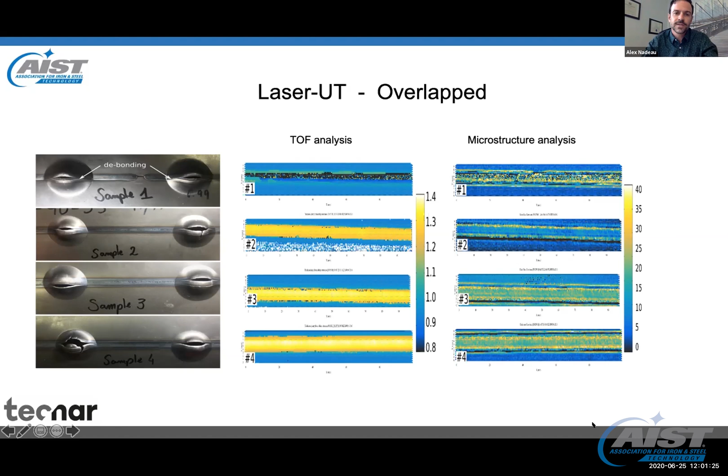So next, we asked our partner: can you produce 10 welds between the parameters of weld sample 1 and weld sample 2, to see how granular the threshold is for determining a bad weld. I'm not going to show all 10 welds, but on this chart you see the 10 samples between good and absolutely bad. They were tested by the bulge, by the pyrometer, and also by visual observation.

What's funny here is that the bulge test revealed that the threshold for rejecting based on pyrometer and visual observation is actually much higher, and that many welds can go through that are actually re-welded—so that's a loss of time in a certain way. But if you look at the UT testing, it was actually in better accordance with the bulge test.

We could see very fine recrystallization for the green welds. The ones that could maybe have passed through the process were showing some irregularities, and we could also be in accordance with the no-go ones that were actually very badly welded.

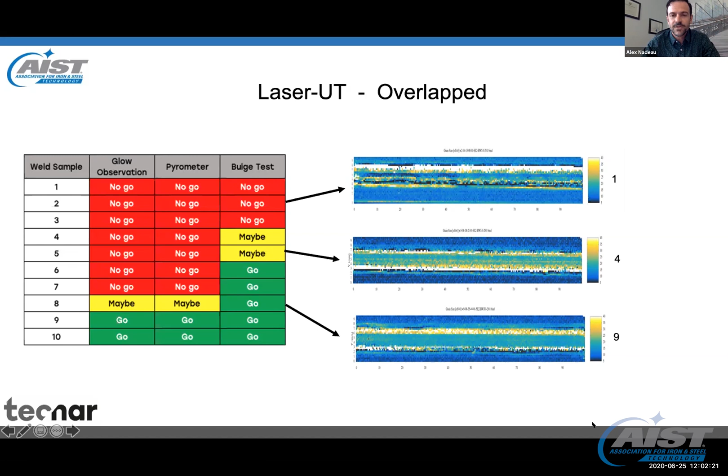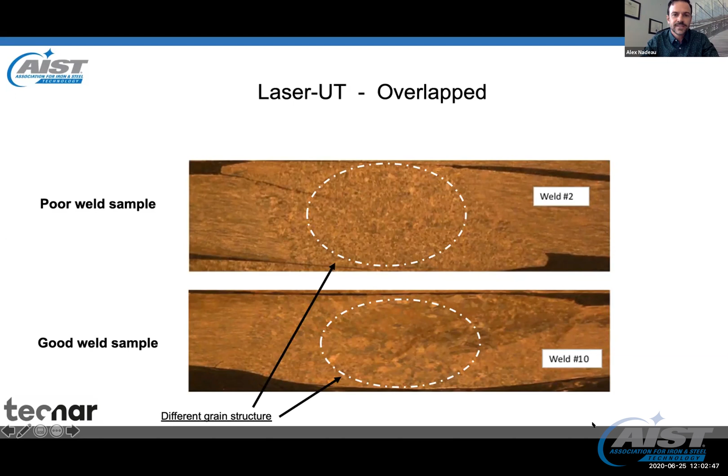If we look at microstructure, I mean weld number 10 and number 2. We could see that number 10 was a good weld—no cracks, and you can see with the eye that the grain structure is different; there was enough heat to have a very mature recrystallization. For weld number 2, although there are visually cracks there, you can see how fine the grains are, and that this weld was not really hot and didn't have the chance to grow nice grains. So it's basically in accordance with what the overlap method also provides—it's a bit more advanced method.

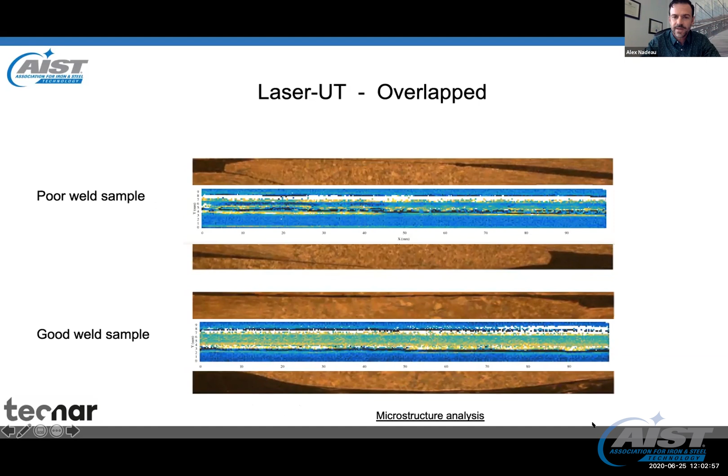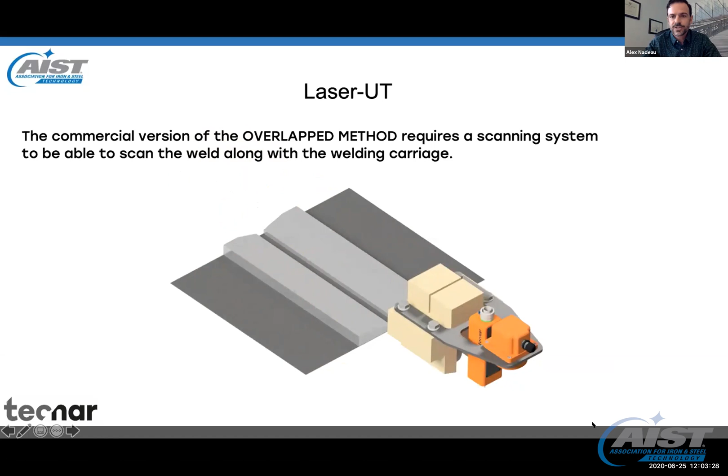But the overlap method needs to scan, so these nice 2D scans take quite a lot of time. We still are aiming at a product that inspects the weld during the welding. This is basically what the system looks like, scanning back and forth to cover the whole weld. Our experience shows that if it's a bad weld, the defects are all along the weld, mostly from lack of fusion or bad recrystallization, so this technology should pick it up pretty nicely.

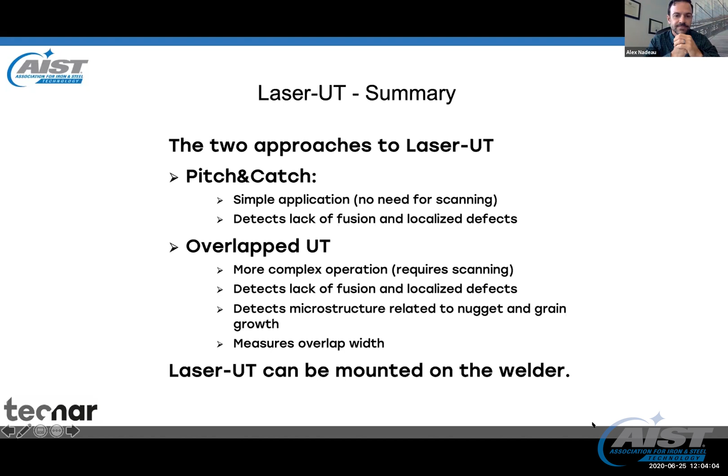So in summary, laser UT has two approaches. Pitch and catch, which is simple, detects lack of fusion or localized defects, and is the way to go for laser keyhole inspection. Overlap UT is a bit more complex, requiring scanning, but it detects lack of fusion and localized defects, and also measures microstructure related to nugget and grain growth. It will also probably be able to measure the overlap width since we have 2D scanning. Laser UT can also be mounted right on the welder. That's about it, thank you very much. My contact information is there if you ever wish to contact me.